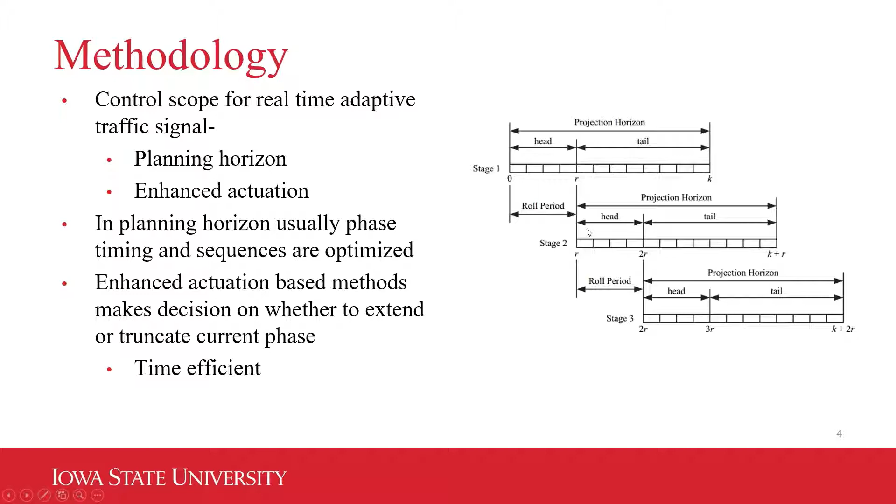For this purpose, we took one algorithm from the planning horizon domain and another one from the enhanced actuation domain. The phase allocation algorithm is from the planning horizon domain, originally developed by a group of researchers from University of Arizona. The enhanced actuation based algorithm is the self-organizing algorithm, developed by a group of researchers from Northeastern University. Both algorithms use an estimated arrival table.

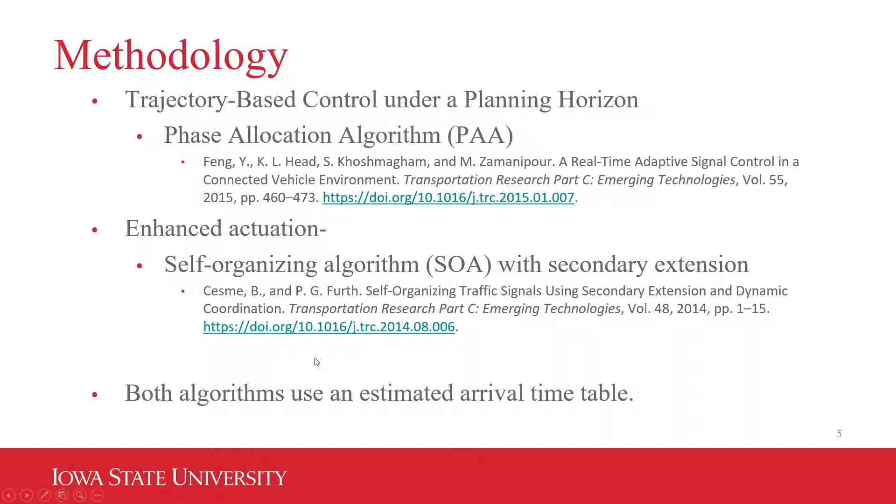Phase allocation algorithm is basically a bi-level optimization where in the upper level a dynamic programming approach is used. The dynamic programming approach in the upper level sends barrier length information to the lower level function, and in the lower level function, based on the barrier length, it optimizes the phase duration and phase sequences, and sends this back to the upper level program, which also stores this information. Later, a backtracking algorithm is used to retrieve the optimal plan.

Phase allocation algorithm has a planning horizon length of 2 cycles, but the head part is actually limited to the first barrier length. So the algorithm runs once per barrier. For the phase allocation algorithm, coordination is considered as a fixed priority request.

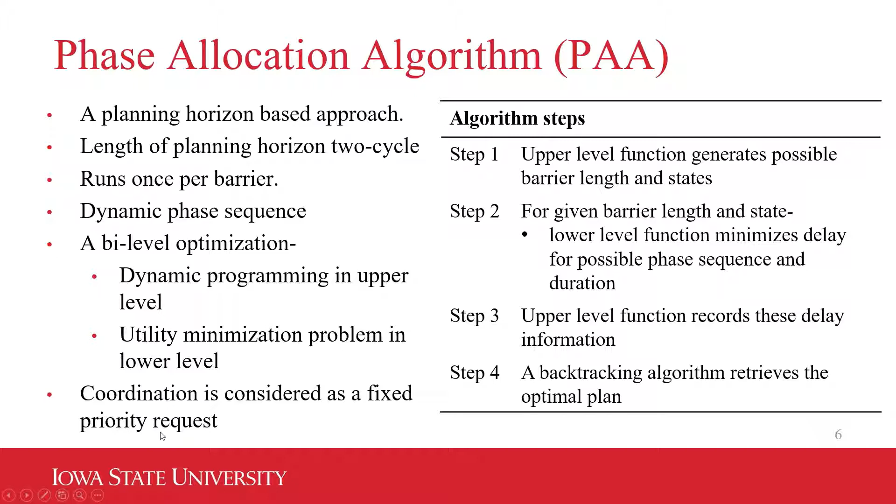Now, the self-organizing algorithm has two different components: one based on efficient actuated control, and later it allows secondary extension for progression along the arterial. To make the actuated control more efficient, we used advanced detectors along with stop bar detectors. We also used minimum green time, maximum green time, lane by lane detection for gap out logic, non-simultaneous gap out, and flashing yellow arrow for backup prevention.

For the self-organizing algorithm's secondary extension part, it allows the platoons in the major arterial an extension period when the major arterial gaps out. What is happening here is that it is basically taking some time from the non-arterial phases and allowing this time to the arterial phases. This causes a very small delay in the non-arterial phases, but it makes sure that the arterial platoons don't have to wait for a very long red period. So this is the main idea.

The larger and denser platoon, the more likely it is that they will get a secondary extension. And the possibility of allowing a secondary extension depends on the number of vehicles, headway, volume saturation ratio, and cycle difference between adjacent intersections.

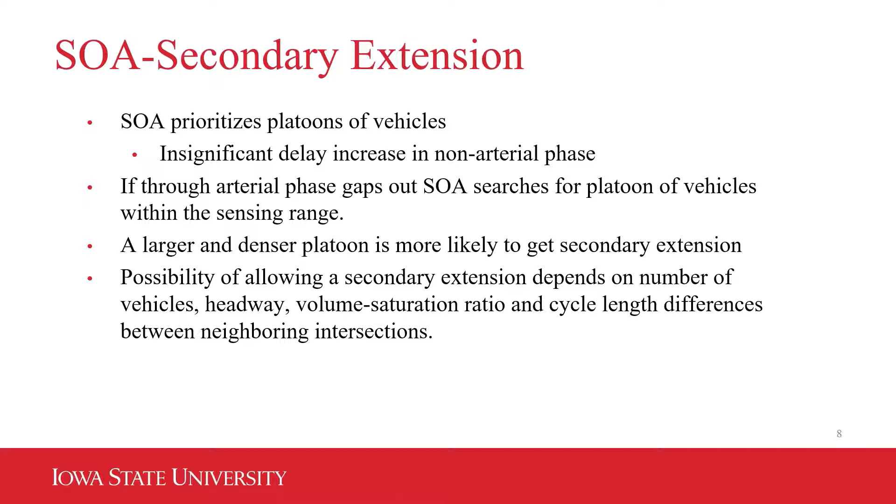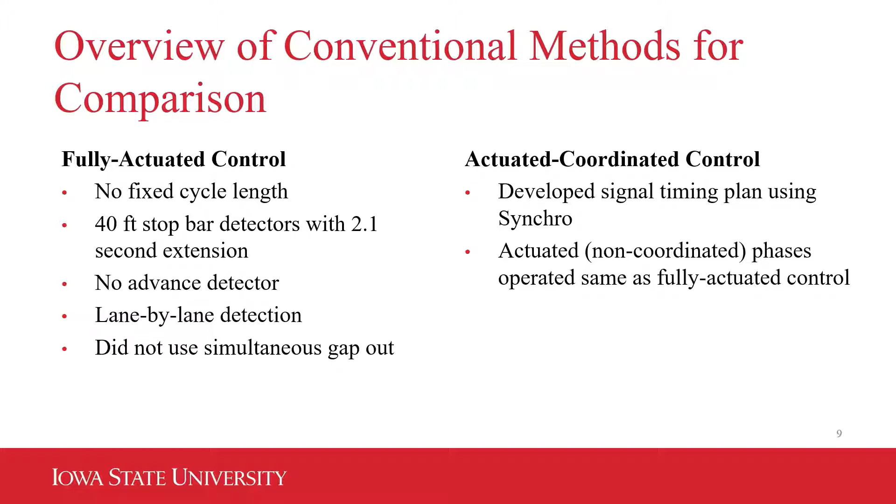Now, we also compared these advanced algorithms with conventional algorithms like fully actuated control and actuated coordinated control. In the fully actuated control, conventional, we didn't use any advanced detectors, and the actuated coordinated control timing plans were optimized through Synchro.

Now we implemented these ideas on a 3-intersection corridor in VISSIM. All these 3-intersection corridors were 8-phase, and all the left turns were protected permitted. Algorithms were coded in Python using COM interface, and virtual ASC/3 controllers were also used, and calls are placed via detector channels through COM.

To implement self-organizing algorithm, it was basically the ordinary fully actuated control, and dummy detectors were also used to hold on phase calls. And for phase allocation algorithm, the timing decisions were supplied by the phase allocation algorithm itself.

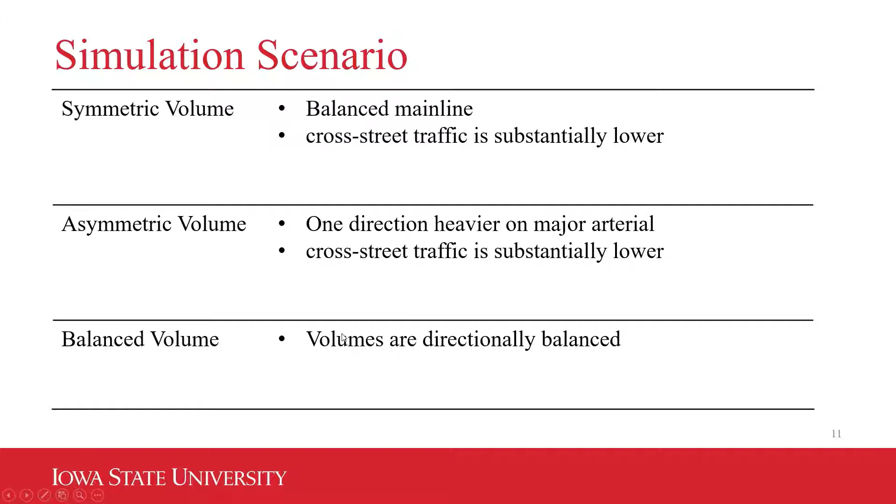Now we also use 3 different volume scenarios. The first one is the symmetric volume, which uses a balanced main line, and the cross-street traffic is substantially lower. In the asymmetric scenario, one direction is heavier than the other in the major arterial, and cross-street traffic is also substantially lower. In the balanced volume, the cross-street traffic and the mainline traffic are quite similar.

Now, if we look at the results for the total delay, we can see that the performances of both the self-organizing algorithm and phase allocation algorithm delay decreases with higher sensing range, and fully actuated control actually performs quite similar to the advanced algorithms. This is actually understandable because it is very difficult to beat the performance of fully actuated control.

But it is not always the goal of signal control to minimize total delay, but rather sometimes the focus is actually to allow progression through the arterial. Also, we can see that the algorithm actually converges at around 1,000 feet for the self-organizing algorithm, and at around 1,500 feet for the phase allocation algorithm.

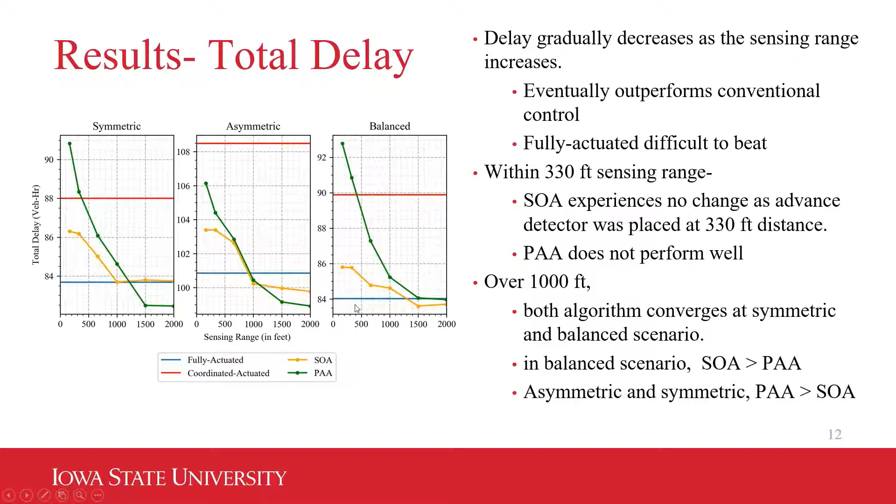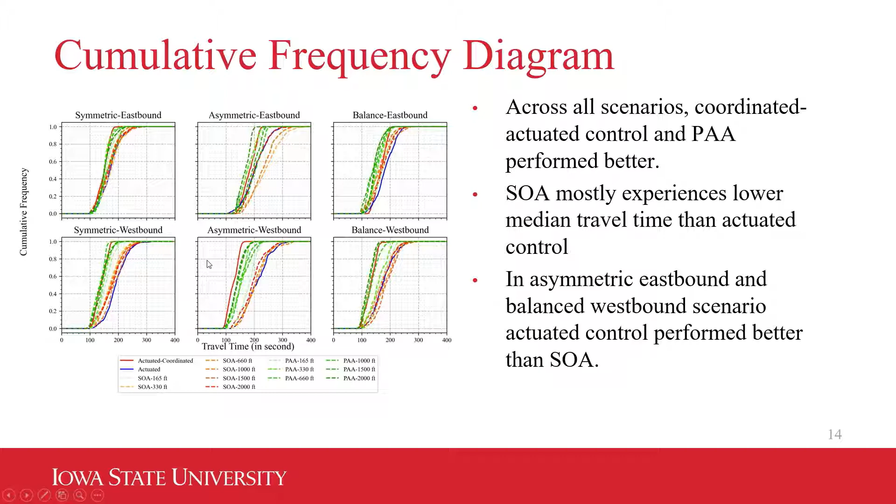Also, the cycle length and phase durations in the self-organizing algorithm get better with higher sensing ranges, and similar is the case in the phase allocation algorithm. There are occasionally very small cycles, but with higher sensing range, these things are not very common.

Now, our final finding is that with trajectory-based signal control method, performance actually improves with increased or higher sensing ranges, but occasionally we found some inconsistency. With lower sensing range, both algorithms were actually underutilized, but above 1,000 feet both algorithms perform better, though which one is actually better between the two depends further on the volume configuration. And above 1,500 feet, both algorithms converge or show little benefit with increased ranges.

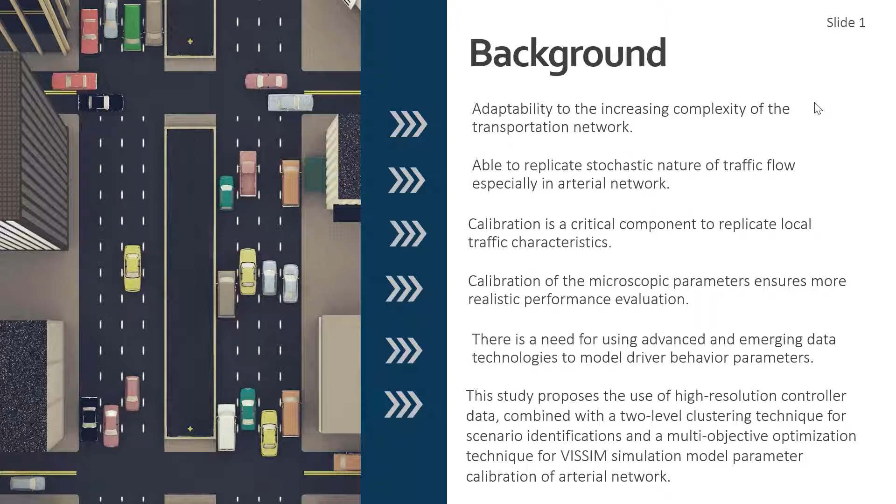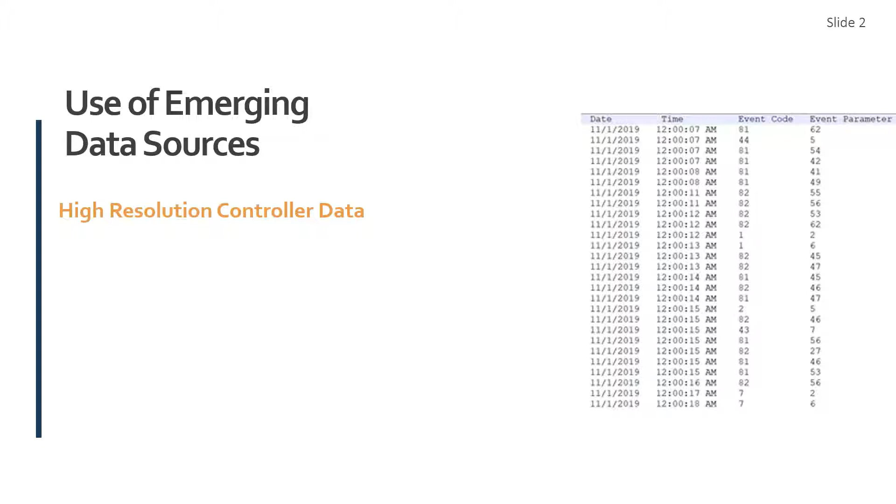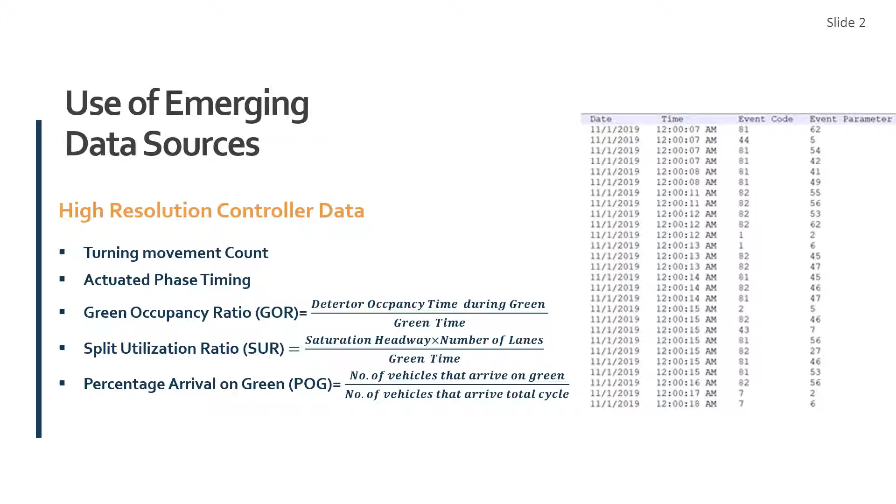We use emerging data sources such as high resolution controller data, which is event-based data with a resolution of 0.1 second. That means every 0.1 second we get a status of the field condition, especially the signal condition, and the conditions are coded in two parameters: event code and event parameter. From there we can access different performance measures of the signal controller, such as turning movement count, actuated phase timing, green occupancy ratio, split utilization ratio, percentage arrival on green, and many others.

Utilizing these performance measures, we first separated the actual field traffic condition using a clustering method, performed in two levels. First, the 24-hour travel time data was categorized, and from there we identified peak hour, off-peak hour, midnight, and midday scenarios.

For each scenario, for example peak hour data, we again clustered based on the green occupancy ratio derived from the high resolution controller data. These clusters had another level: first a through movement clustering, then for each through movement the cluster was based on the left turn movement, so each pattern has distinctive field scenarios showing how much left turn or through movement green occupancy ratio exists for a specific time of day.

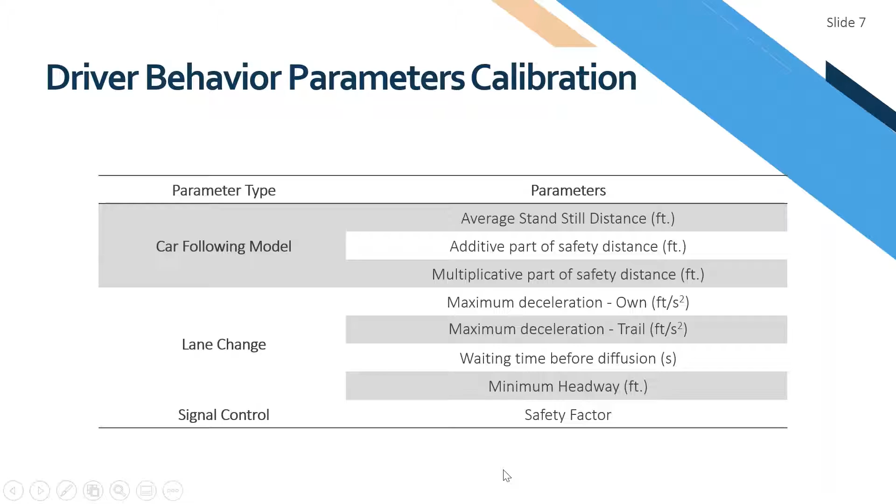For the arterial, we calibrated the following driver behavior parameters, using the objective function of travel time difference. We wanted to minimize the travel time difference between field and simulation, also the split utilization ratio and the throughput from field and simulation, minimizing this data using the optimization.

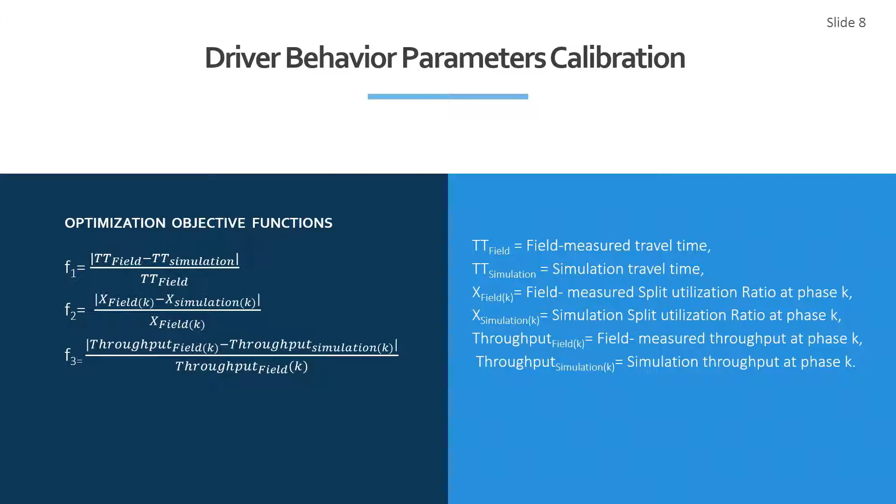When you use the genetic algorithm, we only use the travel time, but for NSGA3 we used all three of these objective functions to calibrate the driver behavior parameters.

This is the step-by-step process of NSGA3. We initialize by creating the population, and we run the simulation for individual population. All of these were done by using the COM interface, and then we take the output from the simulation and compare it with the field data to get the fitness value. Fitness value was the main result of the objective function, and we run the NSGA3 algorithm for like 100 generations, and it gives us the Pareto optimal solution. The Pareto optimal solution is the trade-off between all of the objective functions, which one we want to minimize. It is not a fixed value, but several values of the minimal function.

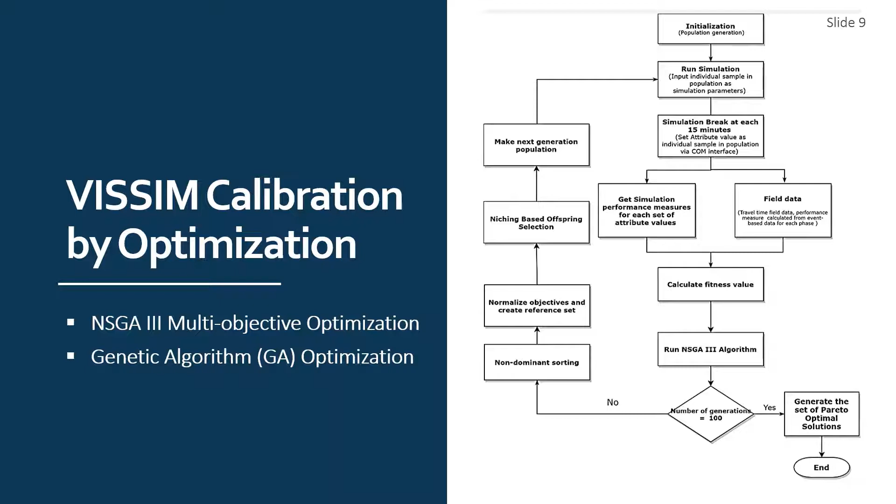So after that, we validated the model based on green occupancy ratio and percentage arrival on green.

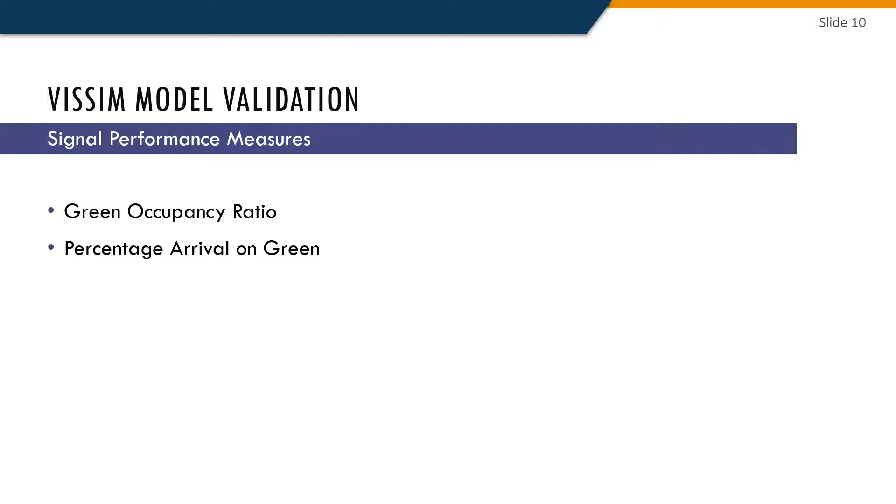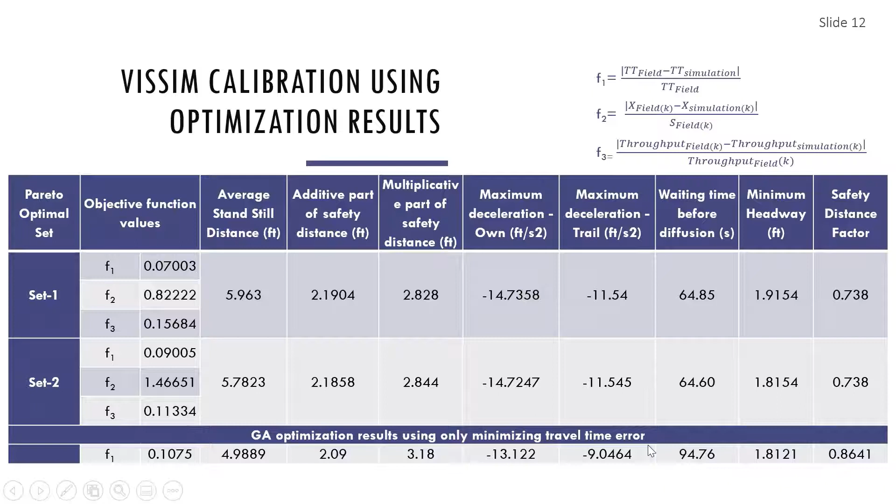So we have these 2 sets with their objective function values, and the driver behavior parameters, which are also different from the default value that VISSIM uses, because it was actually calibrated for the field observation. We also used the genetic algorithm for only travel time, and we have the value here, the travel time error, and also the driver behavior parameters for this algorithm.

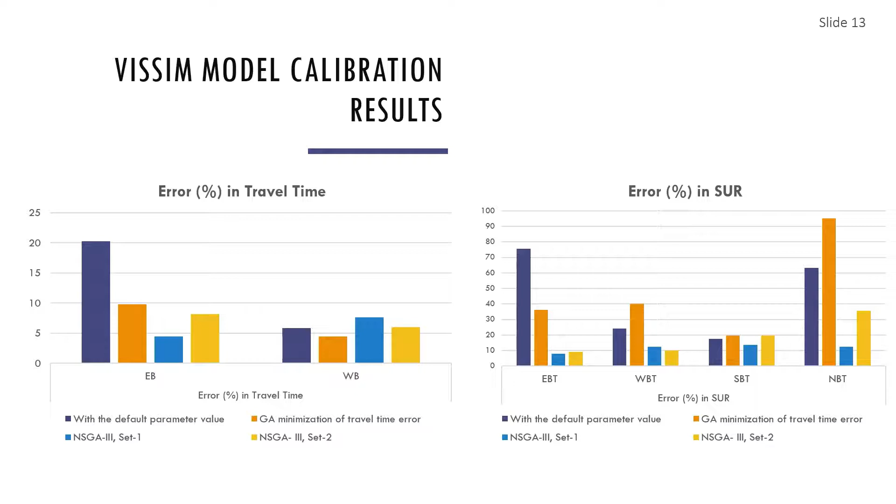The calibration model shows that the NSGA3 sets, set 1 and 2, especially set 1, give us better results in terms of error. It minimizes the error between the field data and simulation data more. The genetic algorithm works well only in terms of travel time, but when we look at other parameters like split utilization ratio, the genetic algorithm does not give good results. In that case, NSGA3 set 1 and 2 are better in terms of calibration results, and also in terms of validation results, which were based on green occupancy ratio and percentage arrival on green. We see that the NSGA3 sets are giving us better results in terms of error in green occupancy ratio and percentage arrival on green.

So this method uses existing and emerging sources and optimization methods to calibrate the VISSIM arterial network. This paper uses microscopic signal timing performance measures for driver behavior parameter calibration, only the signal timing performance measures. When we compare single-objective optimization with multi-objective optimization, we have lower travel time error for both cases, but multi-objective optimization gives significantly lower error for high-resolution controller traffic data performance measures.

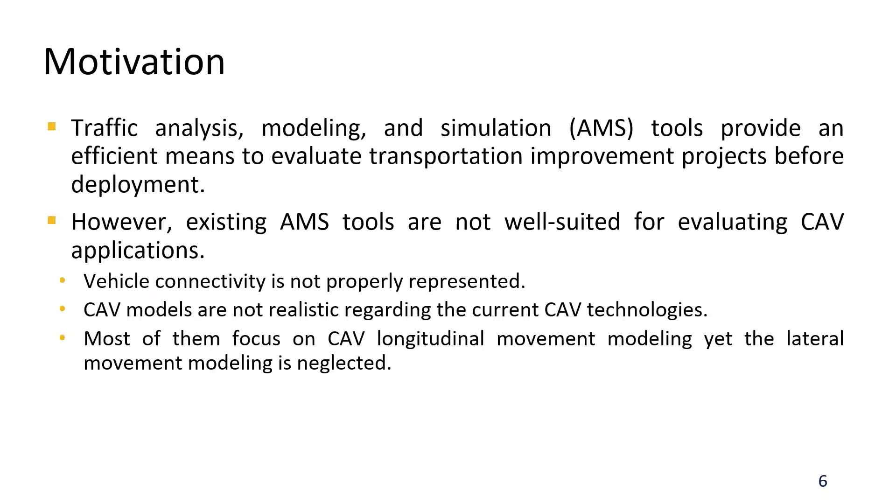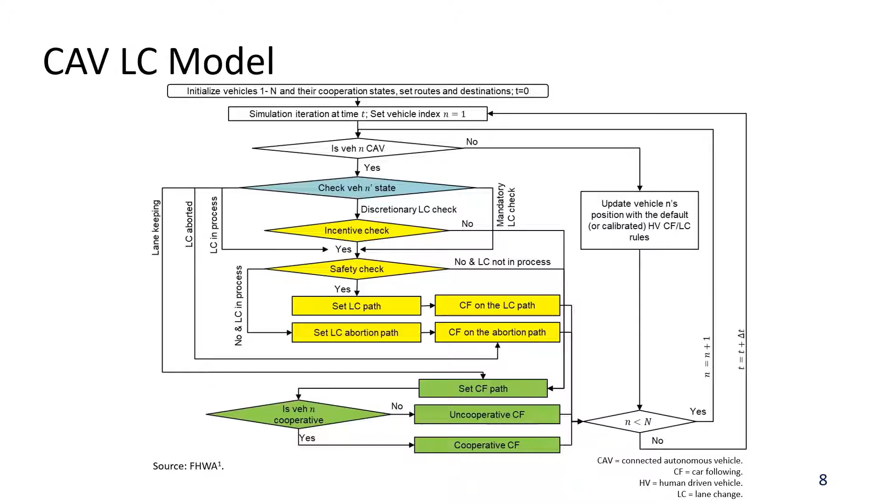So we propose this mixed traffic simulation framework, shown in this flowchart, and the key component is the CAV lane change model, as highlighted in this shadowed figure. I won't bore you with the details, but I do want to highlight some features that we propose.

The first thing I want to introduce is called the cooperative state. This state is defined for CAVs. If the CAV is uncooperative, then during a car-following process, CF meaning car following, the CAV will only follow the preceding vehicle in the current lane, regardless of the lane changing signal of the preceding CAV in the neighboring lane, as shown in the left figure.

But if the CAV is cooperative, then in the CAV's car following, it will follow not only the current preceding vehicle 1, but also the preceding vehicle in the neighboring lane with the lane changing signal on, which is vehicle 2 in this case, as shown in the right figure.

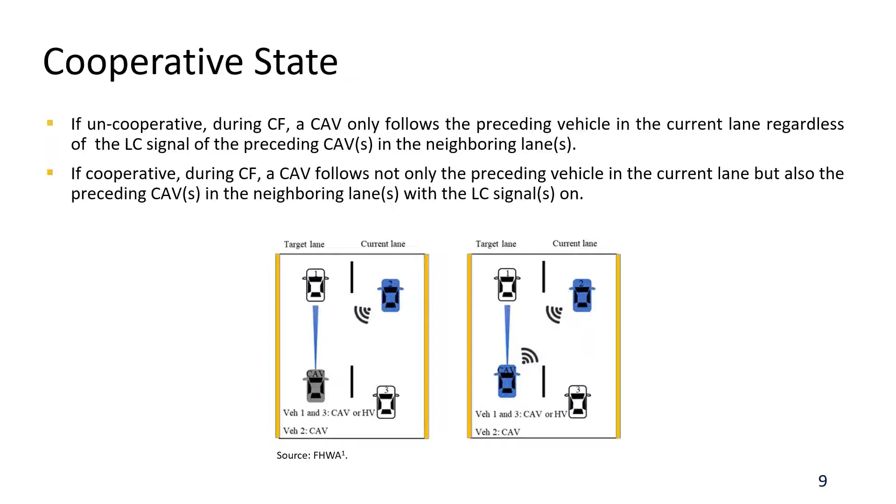And now we talk about the lane change. A lane change for the CAV is initiated when the first two criteria are met. The first one is called the incentive criterion with respect to vehicle 1 and vehicle 2.

If this criteria is met, then the first criterion, incentive check, is met, which means the CAV can travel faster following vehicle 2 rather than following vehicle 1. And I want to point out this incentive criteria is only defined for discretionary lane changes. The second criterion is called safety.

It is defined with respect to CAV and vehicle 3, and it is defined for both mandatory lane changes and discretionary lane changes. Basically, it requires that it is safe for the CAV to make a lane change, and it is also safe for vehicle 3 to accommodate this lane change.

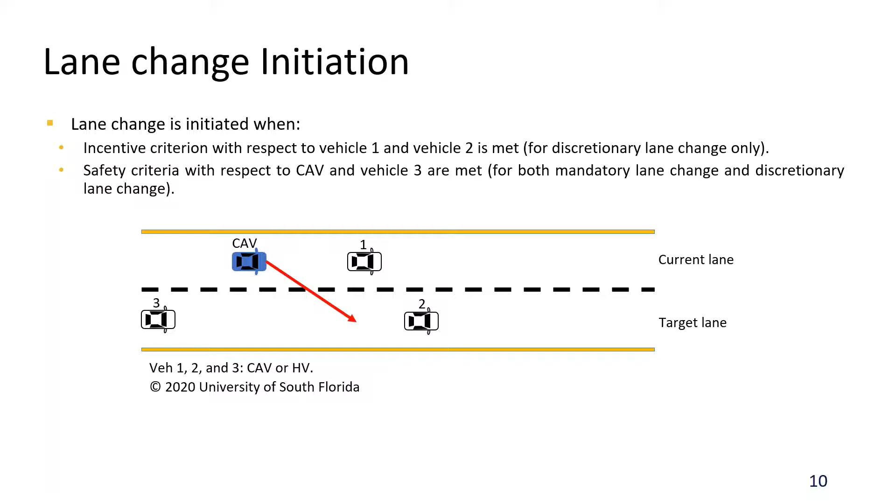If these two criteria pass, then the CAV will make a lane change to the target lane. The safety criteria, as introduced before, are assessed continuously with respect to both CAV and vehicle 3. And if this criteria are met, then this lane change will continue.

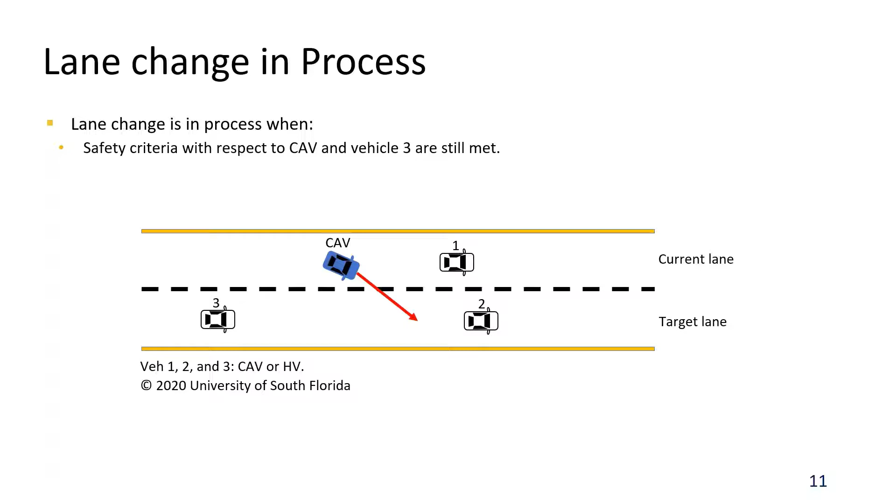Which means the CAV will keep in the designated lane change trajectory and make the lane change. But if the safety criteria fails with respect to either CAV or vehicle 3, then the CAV will abort this lane change. In this case, the safety criterion with respect to vehicle 3 fails, so the CAV will go back to its original lane. This is modeled for safety consideration.

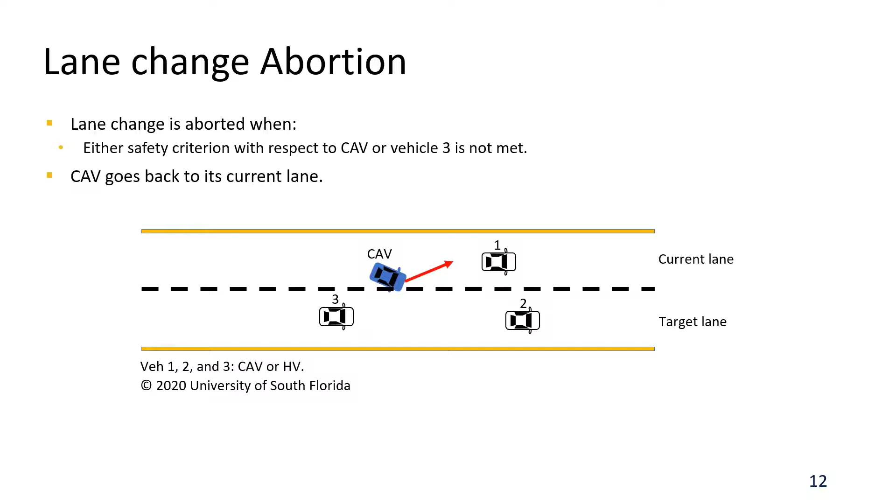So for each case, we have two sets of data. The first round data is used for the model calibration, the model that we just proposed, and the second round data is used for model validation.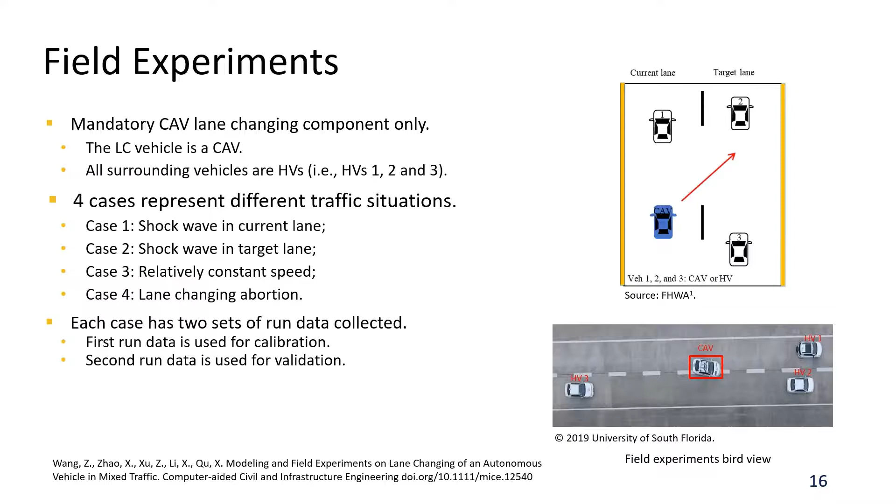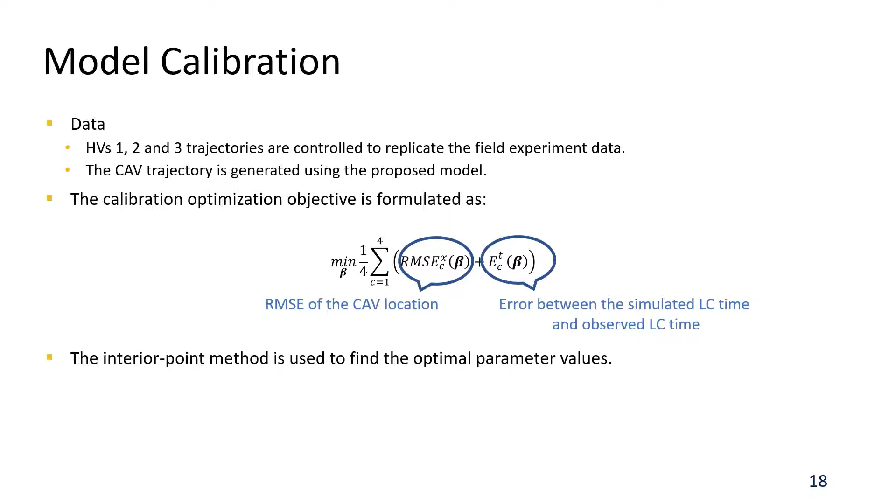For the model calibration, all the human-driven vehicle or HV trajectories are controlled to replicate the field experiment data, but the CAV trajectory is generated using the proposed model. The calibration optimization objective is formulated as the sum of two terms: the first term is RMSE value of CAV location, and the second term is error between the simulated lane change time and the observed lane change time. We use the interior point method to find the optimal parameter values.

After calibration, we move to model validation, which means we use the second round of data to do the validation. Still, like the calibration, we control the human-driven vehicle's trajectory, but we generate the CAV trajectory with the model, and we calculate CAV location and speed.

The two figures below are actually the validation results of case 1. We see the observed trajectory. The pink curves are quite close to the black dash curve, which is the validated data trajectory for the CAV. Vehicle location RMSE is only 1.55 meters, and vehicle speed RMSE value is only 0.25 meters per second.

Here is the summary of all 4 cases. I also want to point out that compared with the model calibration results, the validation results show a less difference, which means we conducted a valid model calibration.

After we calibrated and validated this model, we conducted a case study and sensitivity analysis. We use an I-75 simulation segment. It is about 6 kilometers long, with 3 main lanes, 1 lane on-ramp, and 1 lane off-ramp.

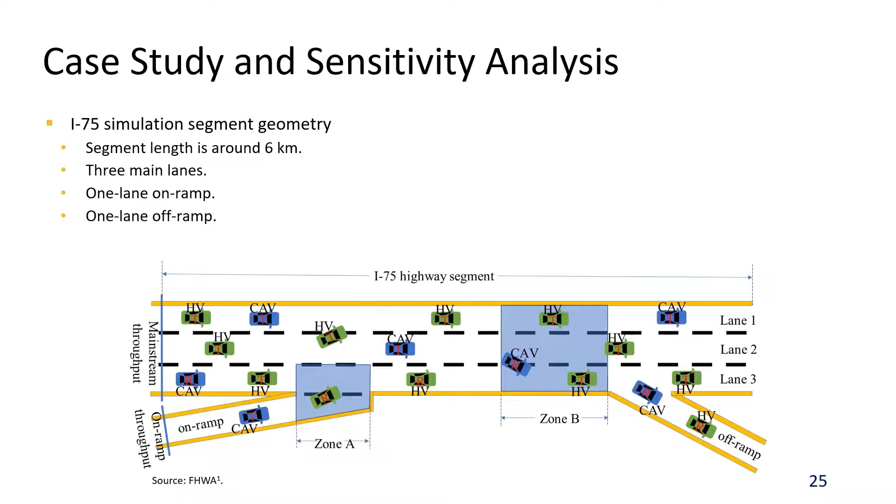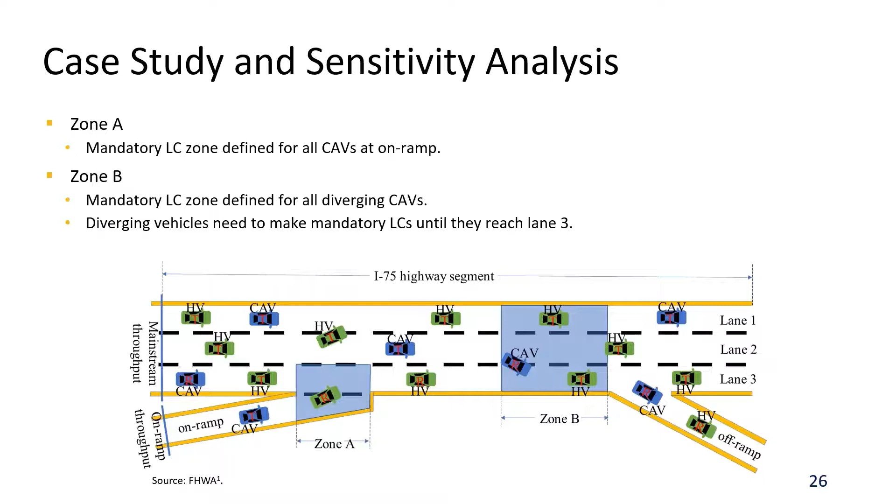We defined 2 zones. The first zone is called Zone A, the mandatory lane change zone for all CAVs at on-ramp. Zone B is a mandatory lane change zone defined for all diverging or exiting CAVs. Diverging vehicles need to make mandatory lane changes until they reach lane 3. This is a screenshot of our simulation in PTV VISSIM.

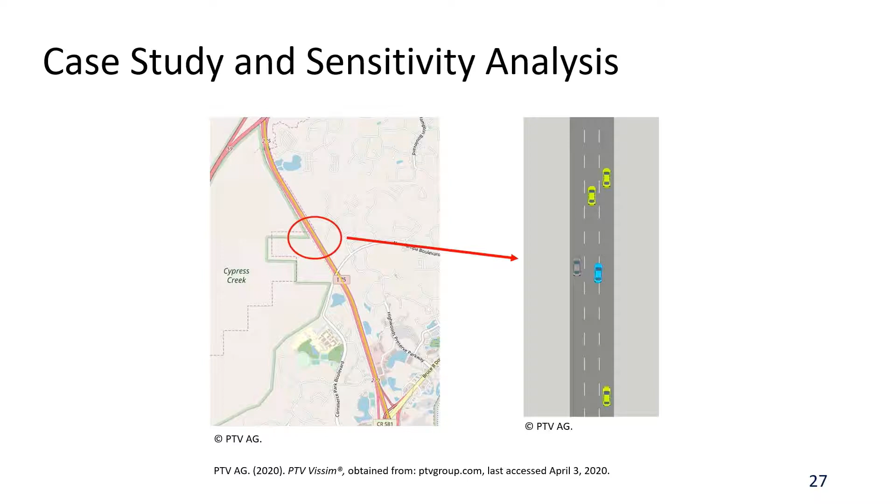Actually, we conducted a set of sensitivity analyses regarding various key parameters. For the sake of time, I will only present the results regarding CAV cooperation rate. This cooperation rate was varied from 0, meaning no cooperation at all, to 1, meaning all CAVs will be cooperative. We see as this cooperation rate increases...

Let me first introduce a few measurements. We use three measurements. The first is average speed, an indicator of traffic mobility; vehicle speed standard deviation, an indicator of traffic stability; and another mobility indicator, traffic flow rate.

The results show that as the CAV cooperation rate increases, the performance, both stability and mobility, first improves until the cooperation rate is about 0.5, and then the performance decreases as the cooperation rate further increases. The reason is that at the initial increase, more cooperative traffic increases the chances for the CAVs to complete lane changes, thus reducing the impedance from lane changes. But as the cooperation rate further increases, cooperative CAVs increase the average gaps between vehicles and thus may slow down the traffic.

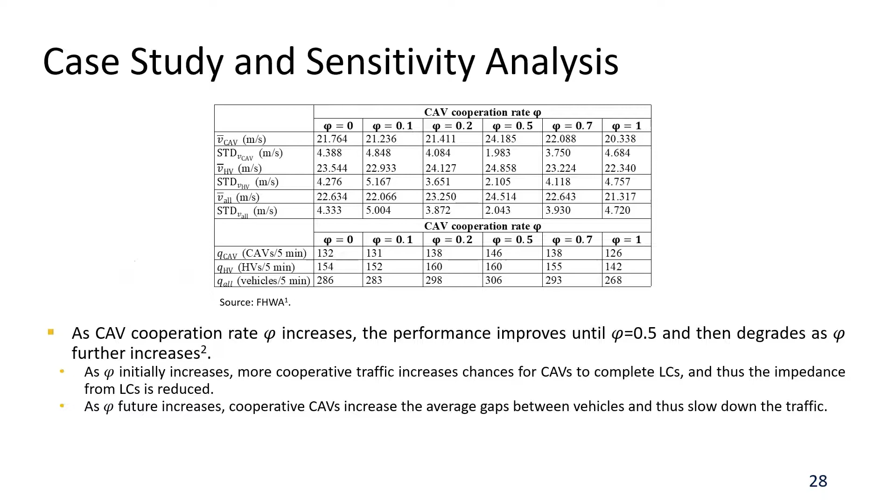Actually, it is the CAV lane change study that got us thinking: what is the difference between a human-driven vehicle following an AV versus it following a normal human-driven vehicle? To test this question, we conducted another set of experiments to see how human-driven vehicles react to CAVs or AVs.

The results show that in the first scenario, the conspicuous CAV scenario, human-driven vehicle behavior might be different in mixed traffic compared with existing traffic. This means in future modeling work, if CAVs or AVs are apparently different from human-driven vehicles, we may need to modify the human-driven vehicle car-following behavior to be realistic. In the second testing scenario, the inconspicuous CAV scenario, the existing human-driven vehicle car-following behavior can still be applied to mixed traffic.